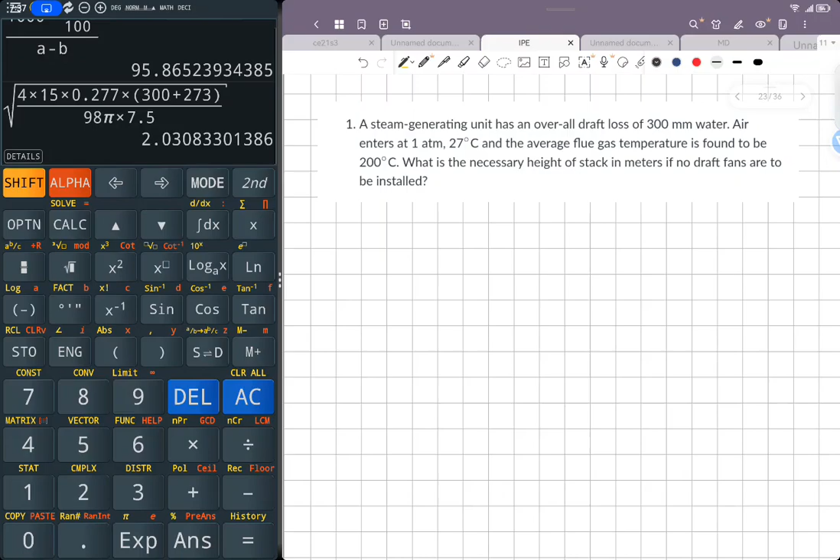Next problem for your stacks and chimneys. Let us read this problem. Okay? A steam generating unit has an overall draft loss of 300 millimeter water. So this is water gauge.

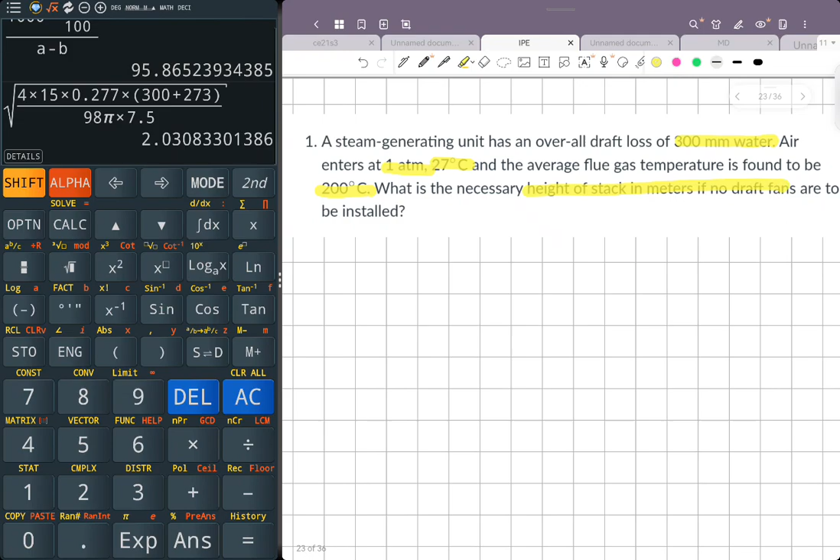Air enters at atmospheric pressure and 27 degrees Celsius. The average flue gas is found to be 200 degrees Celsius. What is the necessary height of the stack in meters if no draft fans are to be installed? So wala kang draft pressure. Okay, natural lang.

So, ano ang first part na gagawin natin dito? The first part that's best to do is to write yung kanyang formula. So, HS is equal to specific weight ng water, height ng water column, divide by specific weight ng air minus specific weight ng gas. Remember that yung specific weight is equal to density times gravity. So, maka-cancel out mo yung gravity dyan.

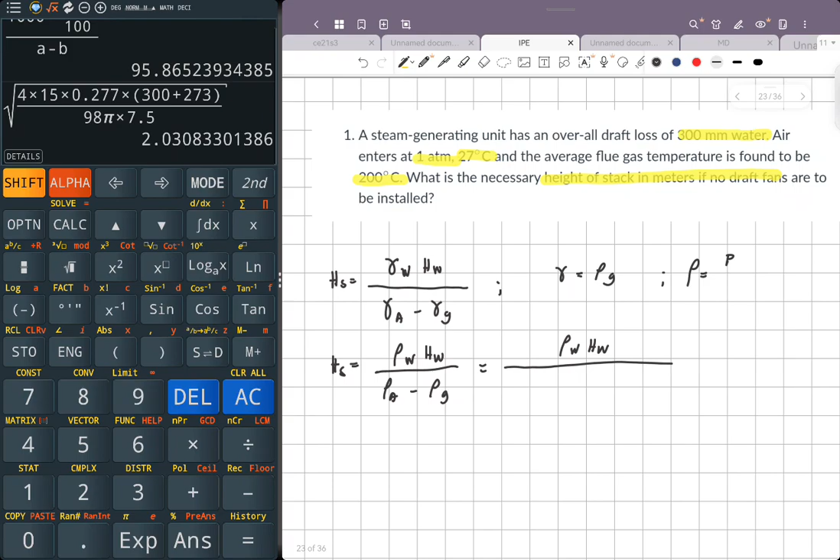Therefore, HS now is density ng water, head of water, divide by density ng air minus density ng gas. Sir, pwede bang idiretso ko na lang dito? Para hindi ako mahirapan. As is natin siya. This will become density of water, height column ng water, divide by, remember, ano ba yung density? Density is pressure divide by RT.

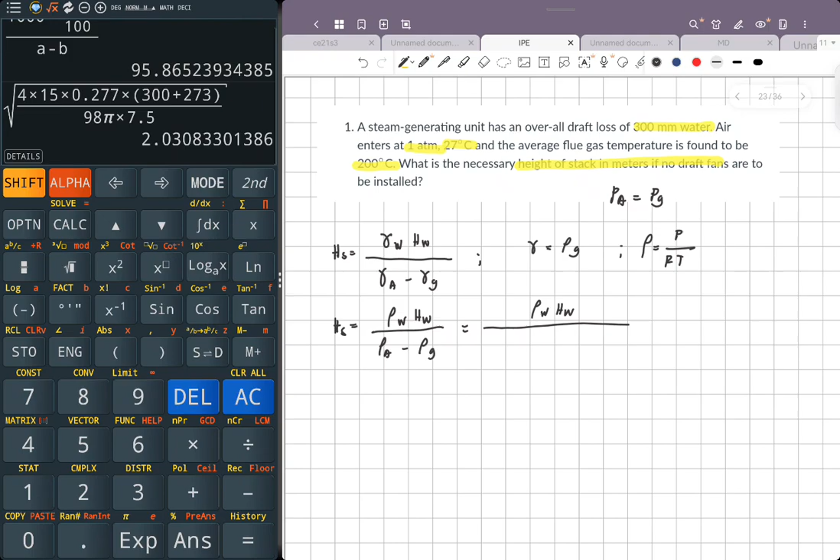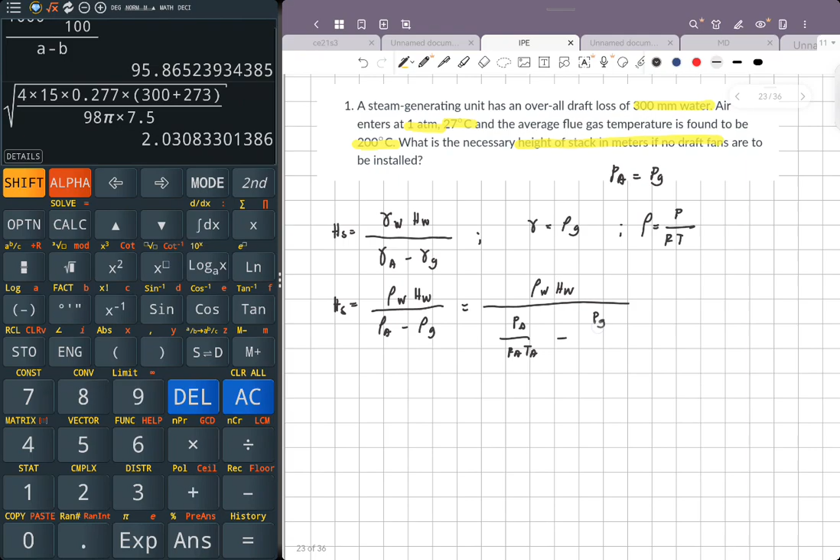So, ibig mo sabihin, sir, dito, remember yung pressure ni air is equal to pressure ni gas. Hindi naman dito sinabing density is equal, ha? Tapos, yung temperature ni gas is kaiba. Dito, lagay ko na. So, density, pressure ni air over R ni air, temperature ni air, minus pressure ni gas over R ni gas, temperature ni gas. So, flue gas is found to be 200.

Problema mo dito, wala kang binigay na R ni gas. The first thing you'll do is to assume that yung R ni gas is same ni air. If all else fail, tandaan nyo that ang ginagamit parati na molecular weight ni gas is from 28 to 30. So, commonly 29. Pag hindi nyo makuha sa board exam, tignan nyo lang yung choices for MW ni gas. Pero, hindi naman binigay, we assume this one. So, pwede nating ilabas dyan.

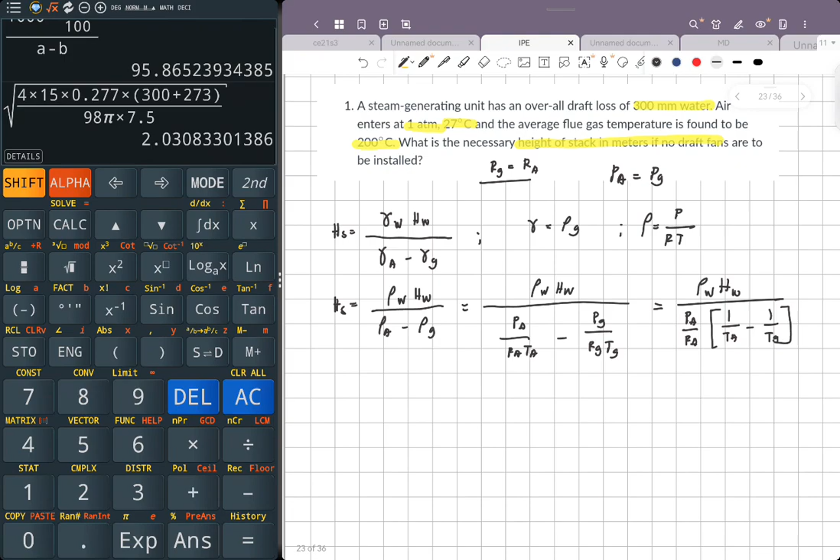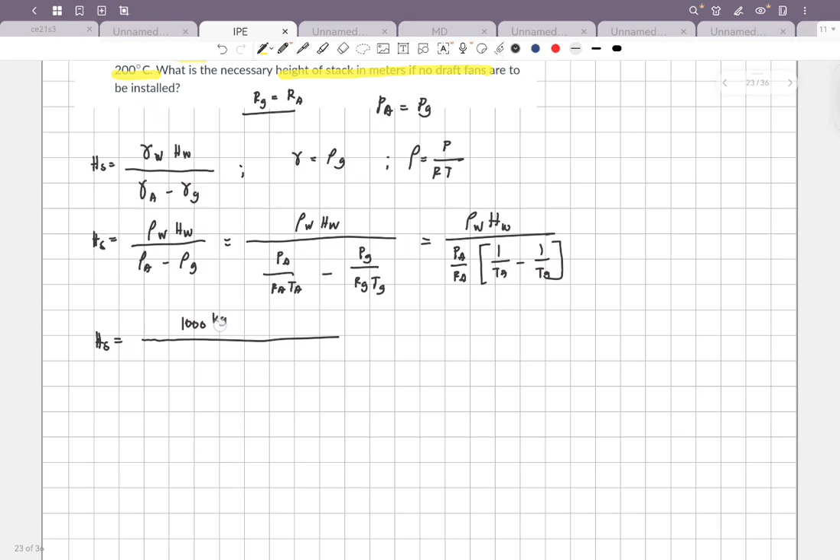So, density ng water, head of water, ilabas natin si pressure ni air over R ni air. Anong natitira? 1 over TA minus 1 over TG. Simplify. The height of the stack is density of water. Density of water is 1,000 kilogram per cubic meter. Tapos, yung head ng water, naka-millimeter, gawin mong meters. So, 300 divide by 1,000 para maging meters.

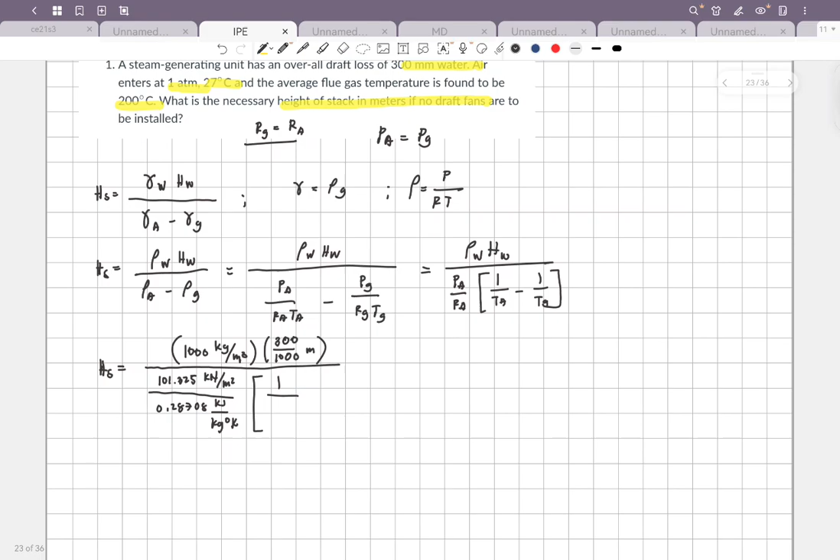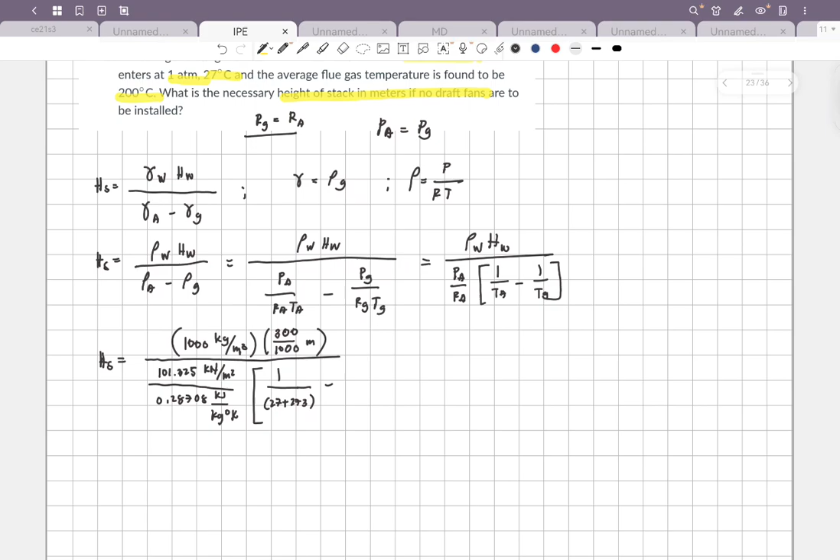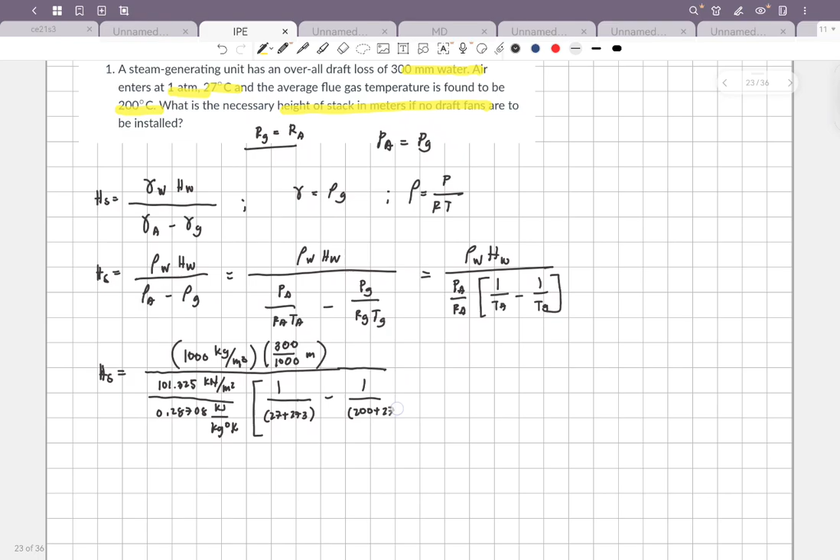Tapos, ilabas mo si PA. PA is atmospheric 101.325 kilonewton per meter squared. Divide by R, 0.28708 kilojoule per kilogram degree Kelvin, times 1 over 27 plus 273 minus 1 over 200 plus 273. Nakalagay dito per degree Kelvin. So, cancel same units: Kelvin, kilogram, meter cube, kilojoule, kilonewton, meter squared. Ang lalabas is meters na lang.

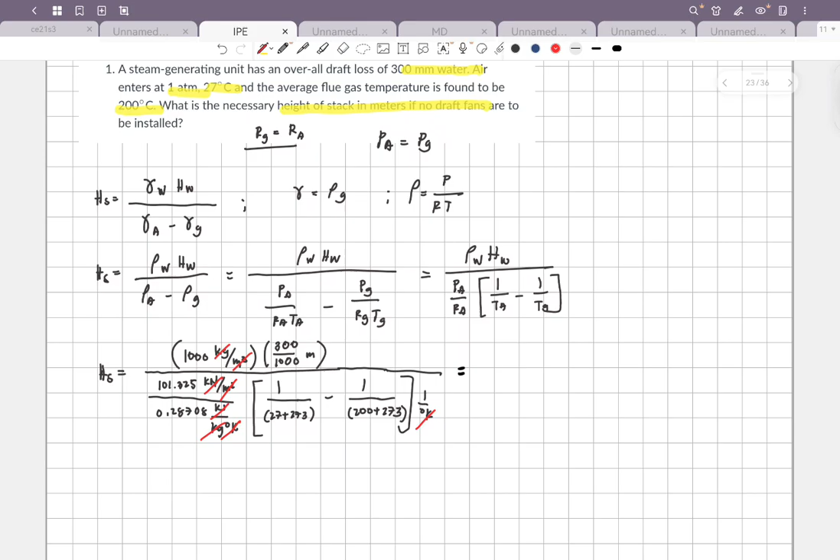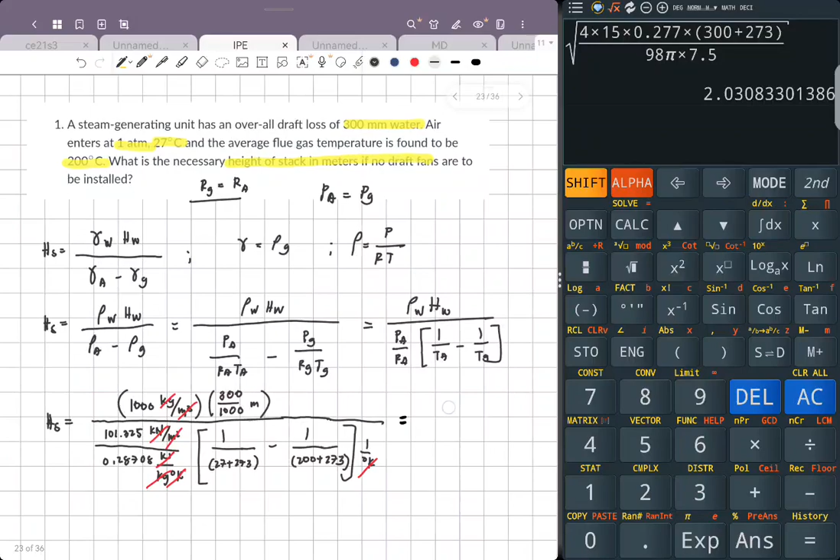So, calculate the value. Labas ko muna yung calculator. 1,000, cancel na nga to. Kahit 300 na lang, cancel mo lang itong 1,000. 300 divide by PA, 101.325, times 0.28708, times 1 divide by 300, minus 1 divide by 473.

So that will become, ang taas, 697.18 meters. Ang taas ng building, almost 1 kilometer. Abot ng Burj Khalifa. Okay? So that is problem number 1.